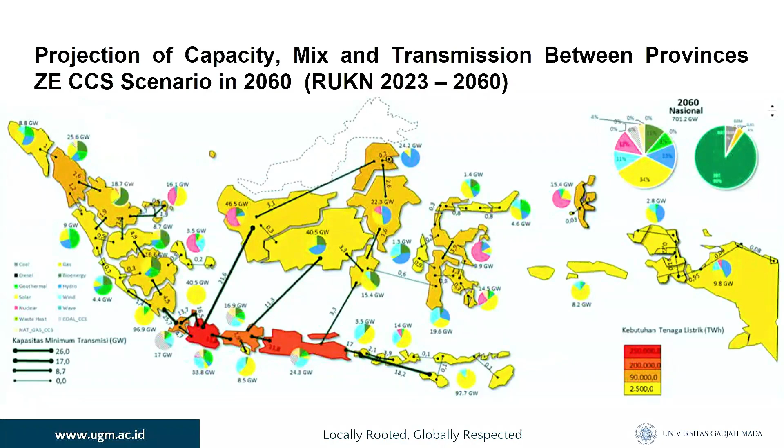Okay, the image depicts Indonesia's projected energy landscape in 2060 under the ambitious zero emission with carbon capture storage scenario. This vision is crucial for achieving Indonesia's climate goals and reducing carbon emission. By 2060, the national energy mix will undergo a significant transformation with a substantial increase in the share of renewable energy sources such as solar, wind, and geothermal.

To facilitate this transition, Indonesia will also need to invest in a robust and efficient transmission infrastructure to connect energy producing regions with energy consuming areas. This will ensure a reliable and sustainable energy supply across the country.

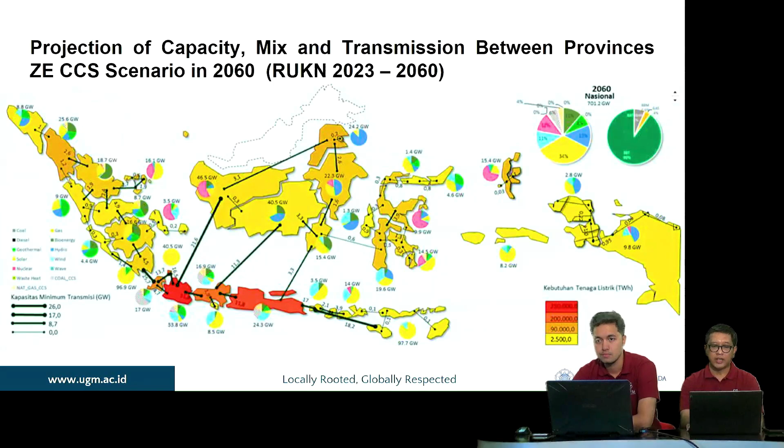Okay, the pie chart illustrates the diversity of power plant types in Nusa Tenggara Timur in 2021 with a total installed capacity of 448.92 megawatts. The dominant power plant type is gas-fired power plant, accounting for 40% of the total capacity. Diesel power plant follows closely behind at 37%, while geothermal power plant and microhydro power plant contribute 3% and 1% respectively.

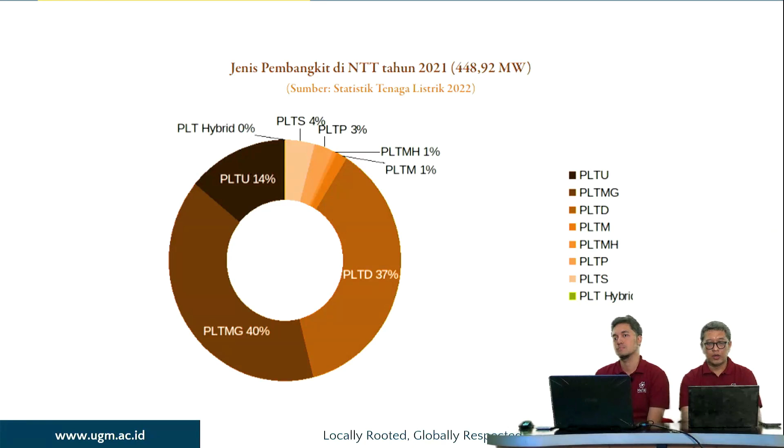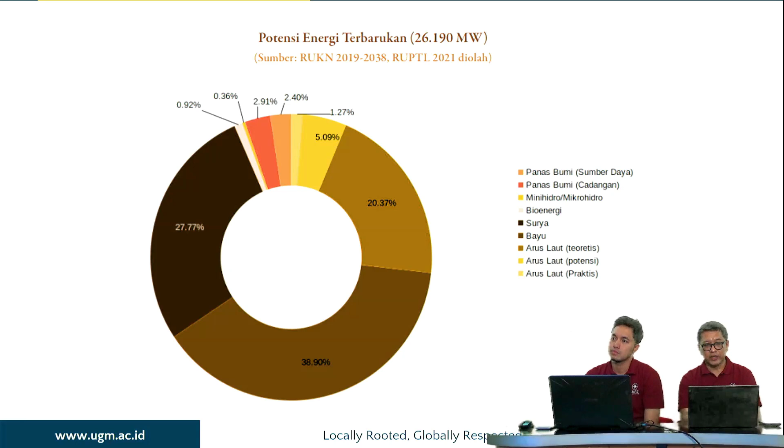Okay, the Oosterschelde Tidal Power 2 project is a successful example of harnessing tidal energy for electricity generation, located within the Oosterschelde, the storm surge barrier in the Netherlands. This project utilizes a series of Tocardo T2 turbines to convert the kinetic energy of tides into clean electricity with an installed capacity of 1.2 megawatt.

The project generates approximately 1.4 gigawatt hour of electricity per year, enough to power 1,000 Dutch households. This renewable energy source contributes to reducing greenhouse gas emission and supports sustainable development in the Netherlands.

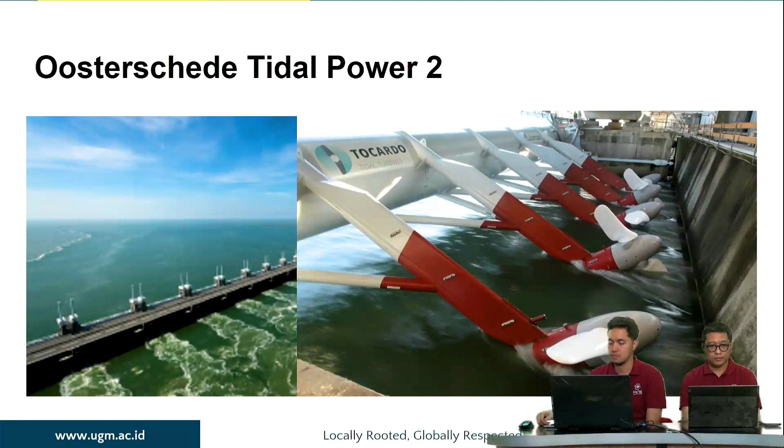Oosterschelde Tidal Power 2, or OTP2, is a tidal power project in one of the openings of the Oosterschelde storm surge barrier, which is part of the Dutch Delta Works. The Oosterschelde is an estuary with the highest tidal movement in the Netherlands. The velocity of the flow is between 4.5 and 5 meter per second.

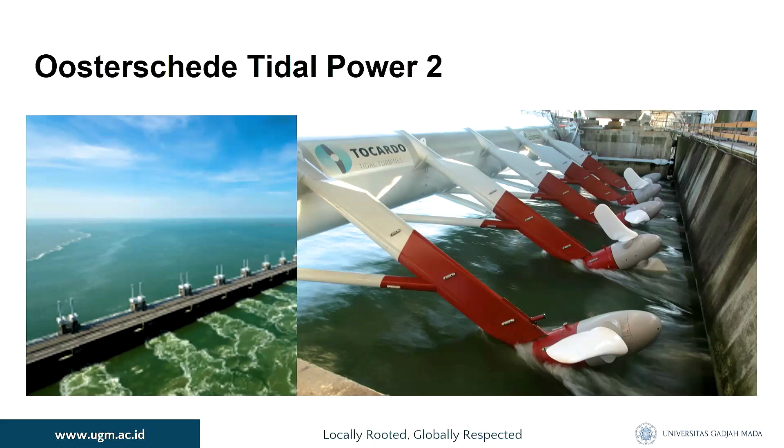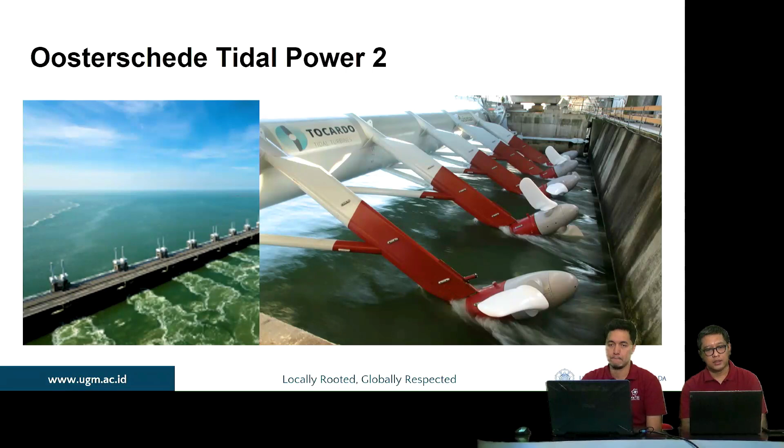The tidal power project contains 5 turbines of 250 kilowatt installed power each. The total power plant has 1.25 megawatt installed capacity, which means power generation for about 1,000 Dutch households. Next.

The tidal power plant Larantuka is a promising renewable energy project located in the Larantuka Strait, Flores Timur, Nusa Tenggara Timur, Indonesia, with an estimated flow velocity between 4.5 and 5.0 meter per second. The project has a suitable potential for power generation. The installed capacity of 30 megawatt is expected to produce approximately 80 gigawatt hours of electricity per year.

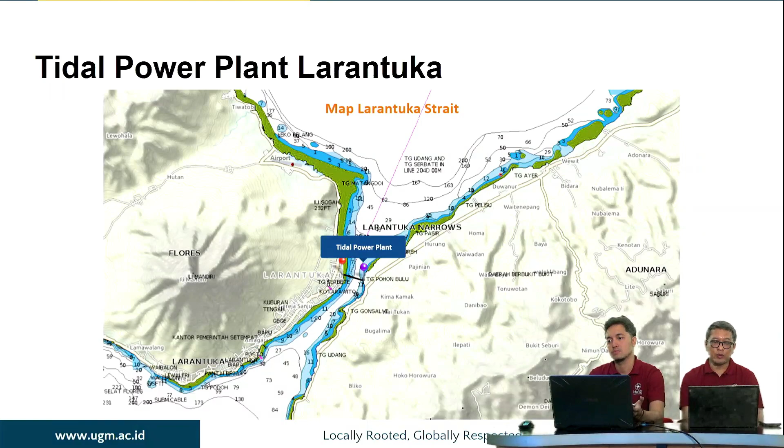The estimated budget for the project, including the construction of the tidal power plant and surrounding infrastructure, is around 225 million US dollar. Next. This is the location of Larantuka tidal power plant in the Larantuka Strait, located between Flores and Adonara. Next.

Okay, the Indonesian government has implemented various policies to promote the development of renewable energy sources. The National Energy General Plan, or RUEN, serves as the primary guideline for energy development, setting targets for the new and renewable energy mix in each province, including Nusa Tenggara Timur. To encourage investment in NRE projects, the government offers a range of fiscal incentives such as income tax exemption, import duty reduction, and value added tax benefits.

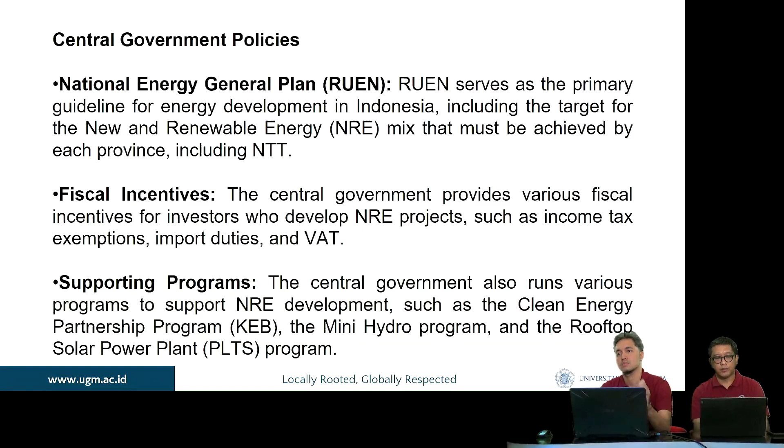Additionally, the government supports NRE development through programs like the Clean Energy Partnership Program, the Mini Hydro Program, and the Rooftop Solar Power Plant Program. These initiatives aim to accelerate the transition to a more sustainable and energy efficient future for Indonesia. Next.

And then the regional governments in Indonesia play a crucial role in supporting renewable energy development. Each region, including Nusa Tenggara Timur, has its own regional energy general plan or RUED, which provides a detailed roadmap for NRE implementation. This RUED outlines the region's renewable energy potential, sets specific targets for the NRE mix, and establishes development strategies. Additionally, regional governments issue various regional regulations or Perda to facilitate NRE development.

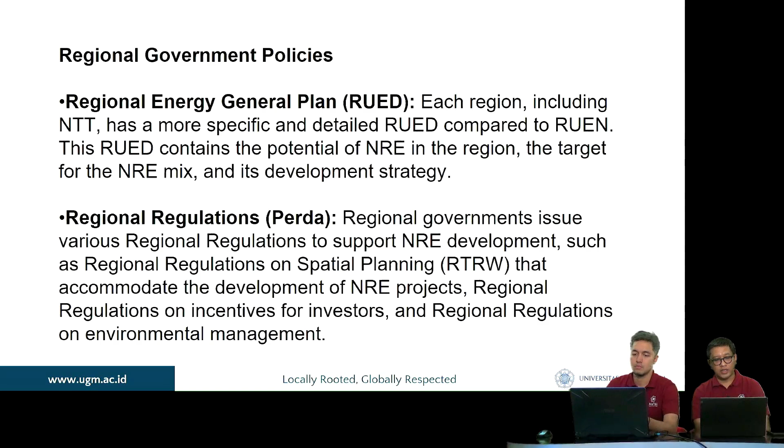These regulations cover areas such as spatial planning to accommodate NRE projects, incentives for investors, and environmental management. These combined efforts from regional governments contribute significantly to Indonesia's overall progress in transforming to a renewable energy based economy.

Okay, the tidal power plant Larantuka project encompasses comprehensive infrastructure development. In addition to the tidal power generation facilities, the project includes the construction of 4 tidal bridge elements, which are equipped with 8 fish flow tidal power turbines. These turbines will harness the energy from the tide to generate electricity. To facilitate transportation and connectivity, a civil bridge will be built to connect the islands of Flores and Adonara. Furthermore, land reclamation efforts will be undertaken in Larantuka to ensure the smooth transition from the bridge to the mainland. Next.

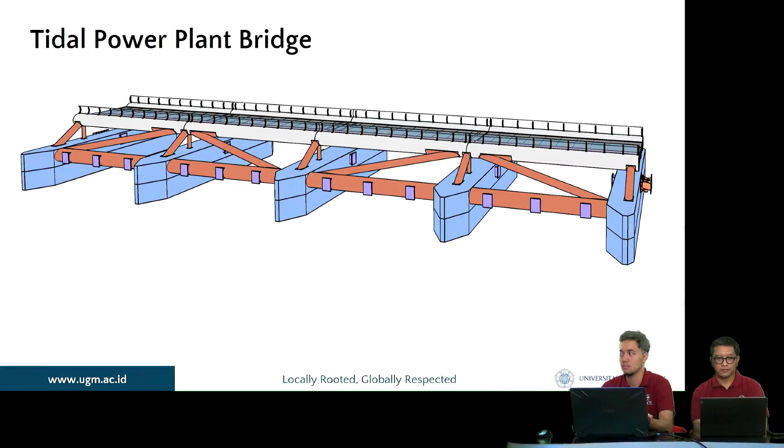This image depicts the design of the tidal power plant bridge, a key component of the Larantuka tidal power plant project. The bridge will serve as a platform for hosting the tidal power turbines, allowing them to efficiently capture the energy from the tides.

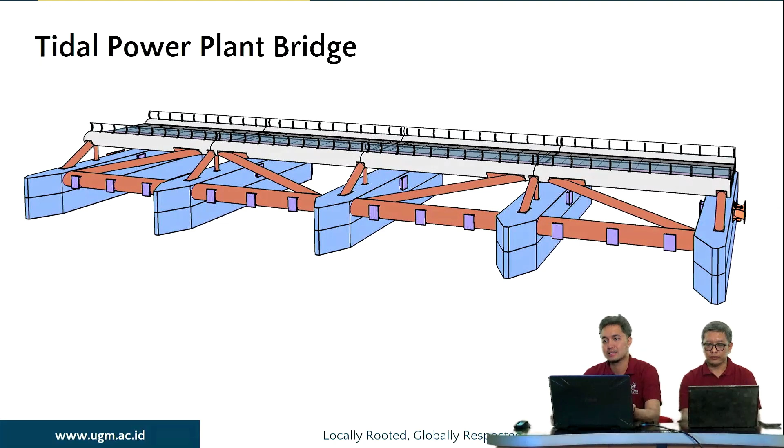Okay, the added value of the tidal bridge consists of the reduction of installation and maintenance costs and the improvement of the power output. The tidal bridge will reduce installation and maintenance costs by 40 to 50% compared to turbines which are placed on the sea bottom. This is mainly achieved by the clever concept of using a larger structure to mount multiple turbines on the electric infrastructure at the surface, fully integrated.

The tidal bridge improves the power output by 10 to 25% because the turbines are placed near the surface where the velocity of the water is higher, resulting in more effective use.

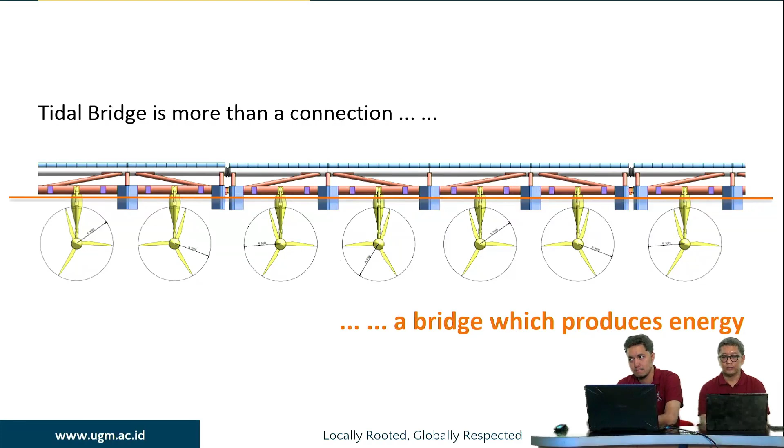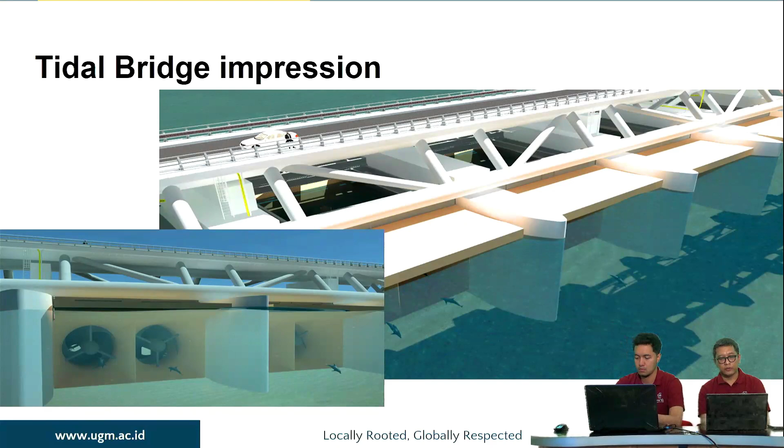Okay, this image depicts an artist's impression of the tidal bridge, showcasing its innovative design and functionality. The top portion illustrates the bridge as a roadway, allowing for transportation across the waterway. The bottom portion highlights the submerged turbines that will harness the tidal energy to generate electricity. The unique design demonstrates the bridge's dual purpose as both transportation infrastructure and a renewable energy source.

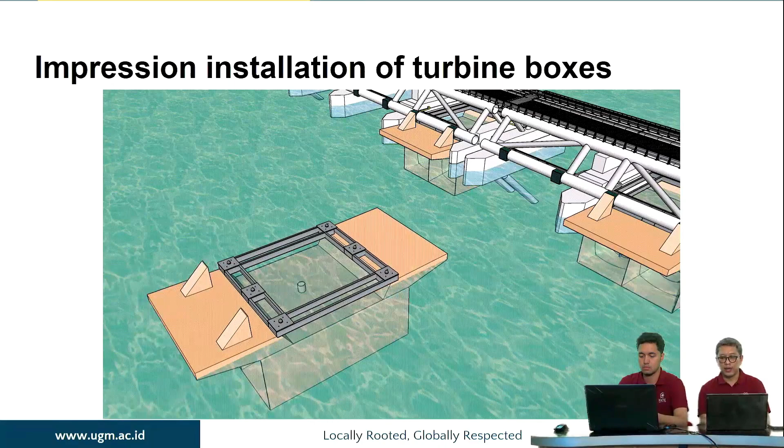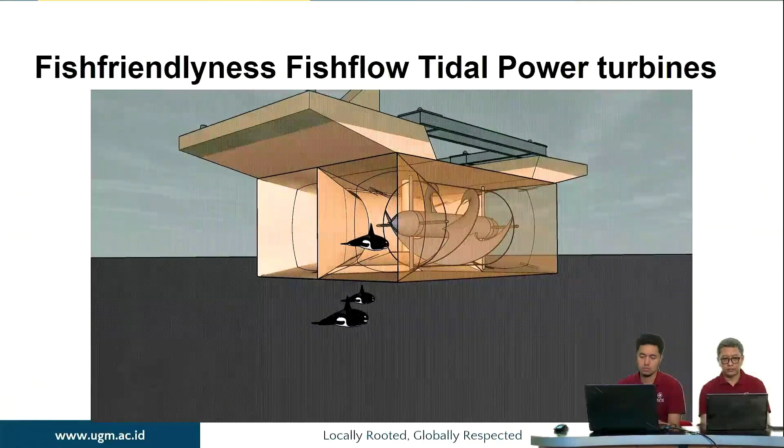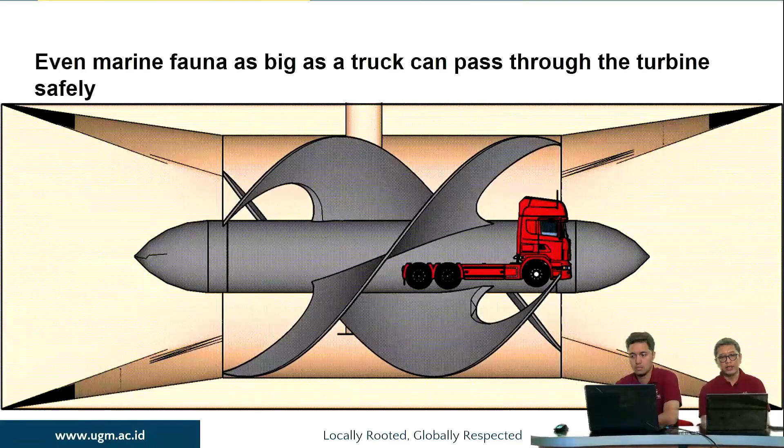Yeah, this video illustrates the unique design of the fish flow tidal power turbines, showcasing their ability to safely accommodate even large marine fauna. A truck is passing through the turbine flow path, demonstrating the spaciousness and minimal risk of harm to aquatic life. This feature highlights the project's commitment to environmental sustainability and responsible energy generation. Next,

Mas Bayu. Okay, thank you, Mas Ferry, for the opening presentation. I will continue the presentation and talk about energy demand and renewable energy potential in Nusa Tenggara Timur, Indonesia. As you can see, the projected electricity demand in Nusa Tenggara Timur through 2050 is measured in gigawatt hours.

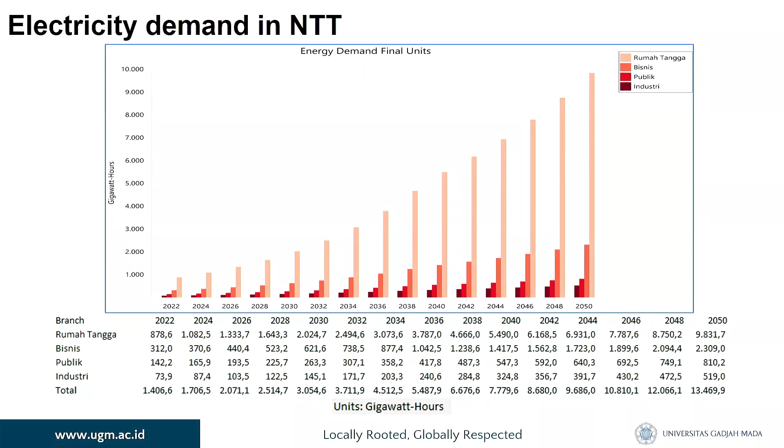Based on the displayed data, the total electricity demand is expected to increase significantly from 1,406.6 gigawatt hours in 2022 to 13,469.9 gigawatt hours by 2050. In detail, the demand by sector is as follows.

Household electricity demand is projected to rise from 878.6 gigawatt hour in 2022 to 9,831.7 gigawatt hour in 2050. This significant rise in electricity demand reflects the economic growth and population increase in Nusa Tenggara Timur, which necessitates an expansion in energy supply capacity to meet these needs.

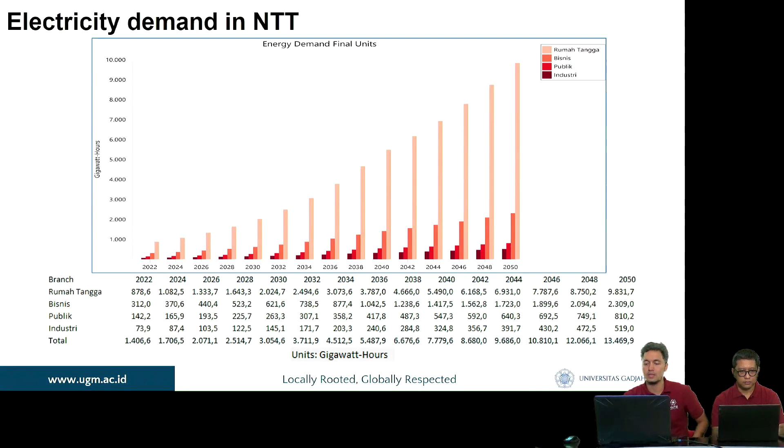Now, the renewable energy potential in Nusa Tenggara Timur from the table above shows the potential. The total energy potential reaches 23,812 megawatt, with an installed capacity of renewable energy now of 29.23 megawatt, an average utilization rate of 0.12%.

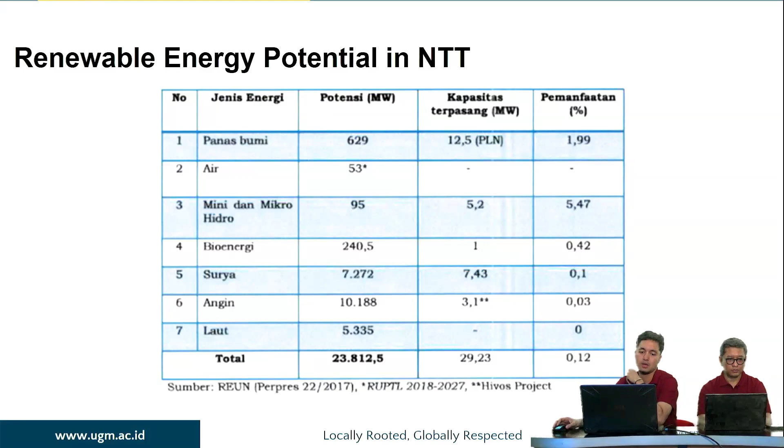Overall, Nusa Tenggara Timur has significant potential for renewable energy, but the level of utilization remains very low. Geothermal is 1.99%, micro hydro is 5.47%, and last, ocean energy is less than 1%.

And the scenarios that we have simulated: we have two scenarios. The first is the BAU scenario, or business as usual scenario, based on RUPTL in Nusa Tenggara Timur, with the availability of fossil energy in 2022 at 96.4%, and in 2050 at 89.9%.

And the second scenario is the optimistic renewable energy scenario, based on potential energy by RUED in Nusa Tenggara Timur, with the availability of fossil energy in 2022 at 96.4%, and in 2050 at 36.6%.

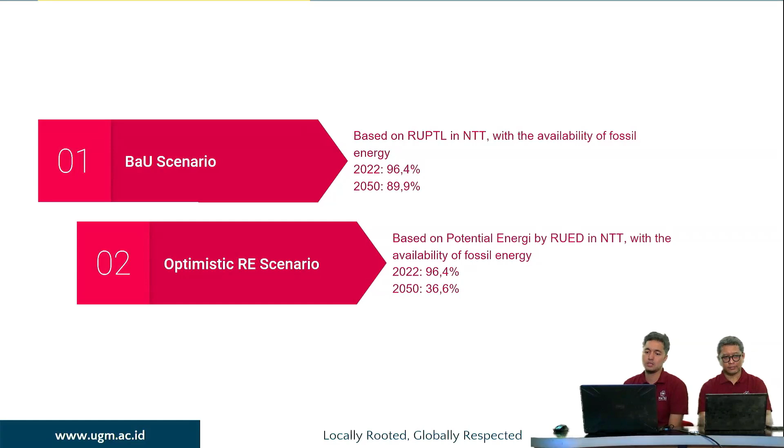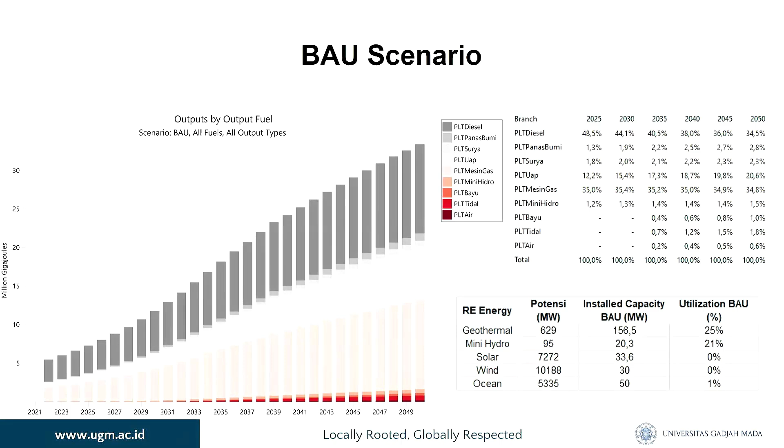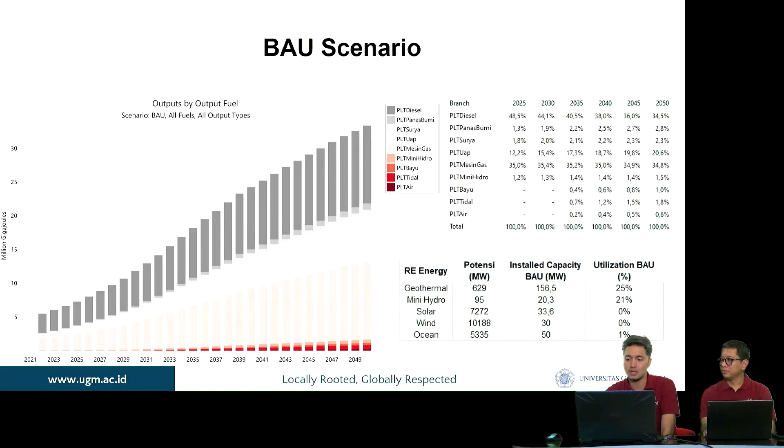Okay, we move to energy analysis based on the output result in the BAU scenario. The largest percentage of electricity generation comes from diesel power plants, followed by oil and gas power plants, and then coal power plants. From this data, it is evident that fossil energy still plays a dominant role in supplying electricity in the province Nusa Tenggara Timur. Furthermore, the utilization of existing renewable energy potential has not been maximized, as shown in the image above.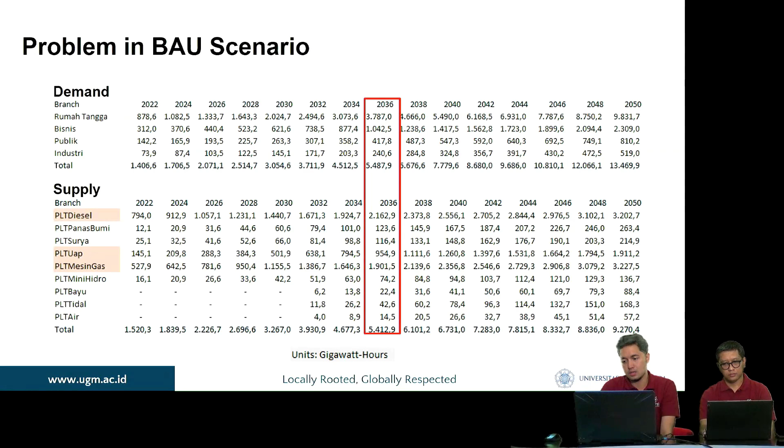Now, the problem in the BAU scenario, based on the RUPTL in Nusa Tenggara Timur: it can be seen that by 2036 Nusa Tenggara Timur will experience a shortage of electricity supply, which will continue in the following years. This may be caused by the underutilization of existing energy potential or the lack of available technology in Nusa Tenggara Timur. By 2050, Nusa Tenggara Timur is projected to experience an electricity supply shortage of 4,199.5 gigawatt hour.

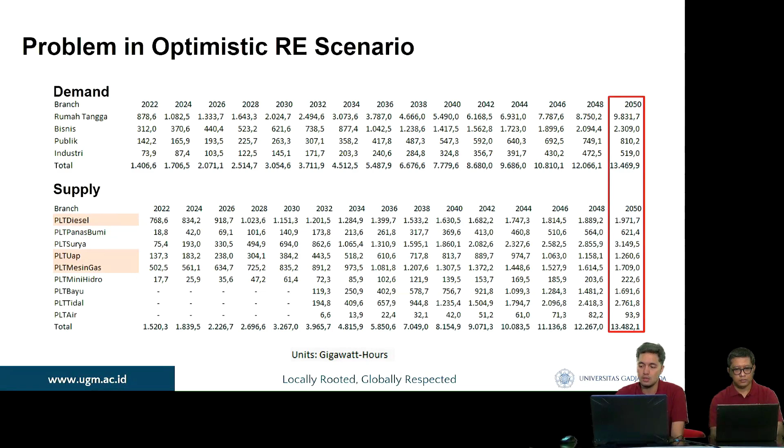So there is no problem in the optimistic renewable energy scenario because we have made some solutions to increase the use of renewable energy and reduce the use of fossil fuel as the source of power generation in the province Nusa Tenggara Timur. As can be seen from our analysis and simulation, Nusa Tenggara Timur does not experience an energy shortage by utilizing the available potential energy sources. Maybe we can go back to the previous slide.

The renewable energy potential in Nusa Tenggara Timur: if we can maximize the potential in the future, it's possible that Nusa Tenggara Timur could supply its electricity independently, only using renewable energy power plants.

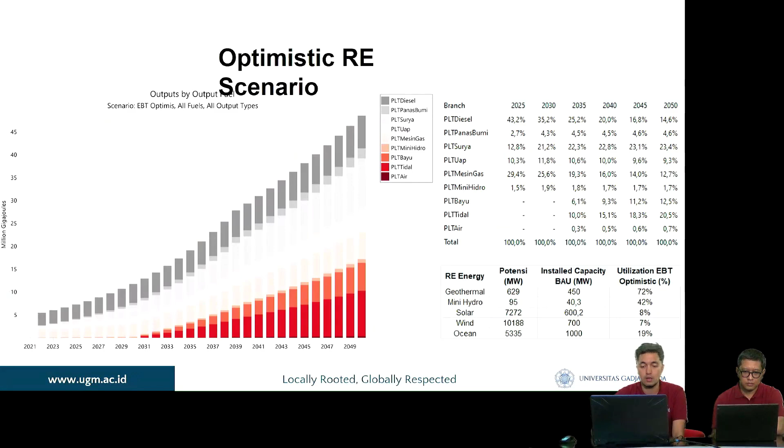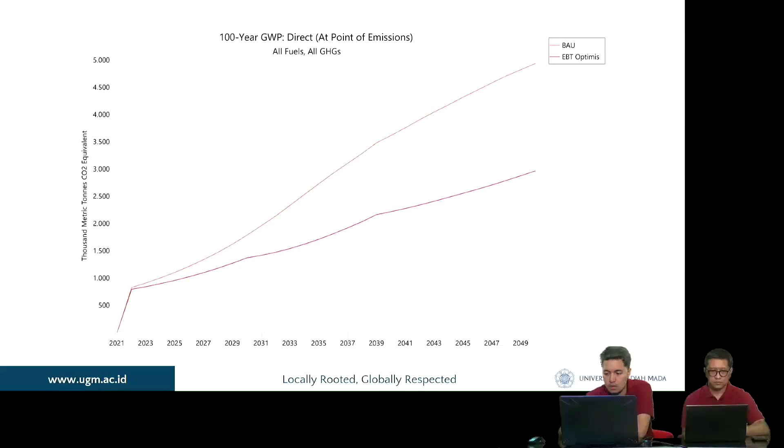Meanwhile, under the optimistic renewable energy scenario, which assumes a more aggressive adoption of renewable energy, emissions remain lower than BAU, though still on an upward trend, reaching around 3,000 thousand metric tons of CO2 equivalent by 2049. This graph highlights that although the optimistic renewable energy scenario can cap the rate of emission growth, both scenarios exhibit an upward trend in emissions through 2049.

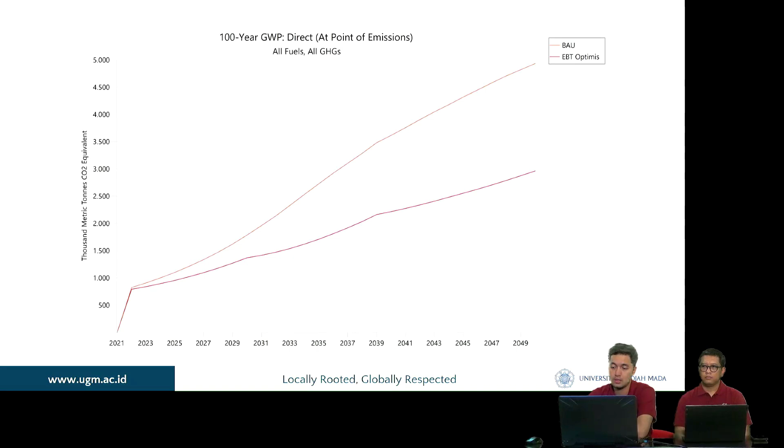Okay, the conclusion maybe can be read by Mas Ferry.

Thank you, Mas Bayu. The conclusion, we have three. The first is renewable energy potential. The project highlights the significant potential for renewable energy development in Nusa Tenggara Timur, with tidal power being a promising source. The second is infrastructure development. The project involves the construction of innovative infrastructure, such as the tidal bridge and its integrated turbines, demonstrating the potential for combining renewable energy generation with other infrastructure needs.

And the last is challenges and opportunities. The analysis of different scenarios underscores the challenge in meeting future energy demand in Nusa Tenggara Timur. Even with ambitious renewable energy targets, it emphasizes the need for a comprehensive and integrated approach to energy planning and development in the region.

And the expectations, we also have three. The first is increased renewable energy adoption. The project will significantly contribute to Nusa Tenggara Timur's renewable energy mix, reducing reliance on fossil fuel and promoting a cleaner energy future. The second, economic benefit: the project is expected to stimulate local economic growth through job creation, infrastructure development, and increased tourism.

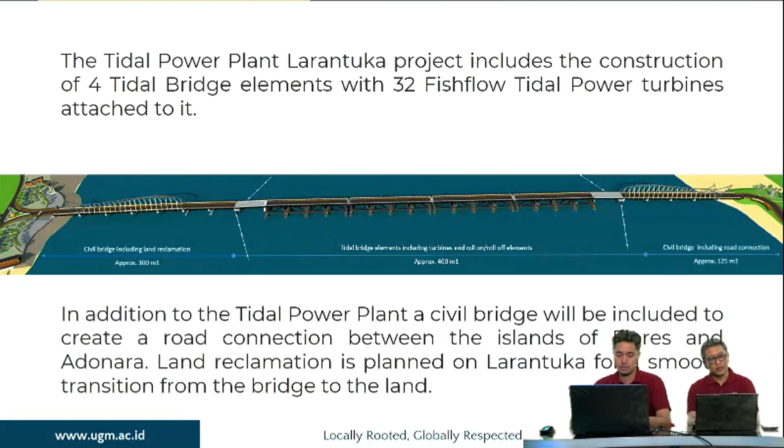I'll try to answer for the key technical features. Maybe we can go to slide 16, Mas Bayu. Okay, we have four items for the key technical features. The first is the tidal bridge element. This project incorporates four bridge-like structures that host the power generation equipment. And the second is 32 Fishflow tidal power turbines. These specialized turbines are designed to generate electricity from tidal movement.

Number three is the civil bridge component. In addition to power generation, the project includes a bridge connecting the islands of Flores and Adonara, serving the dual purpose of energy production and transportation infrastructure. And the last is the land reclamation plan on Larantuka to ensure a smooth transition from the bridge to the land. And for the question regarding environmental concerns, we have five.

The first is fish-friendly turbine design. The Fishflow tidal power turbines are specially designed to allow safe passage of marine life, including large marine fauna. The second is a renewable energy source: by harnessing tidal power, the project reduces reliance on fossil fuels, thereby lowering carbon emissions. And then minimal visual impact. The integration of the power plant with the bridge helps minimize additional visual impact on the landscape.

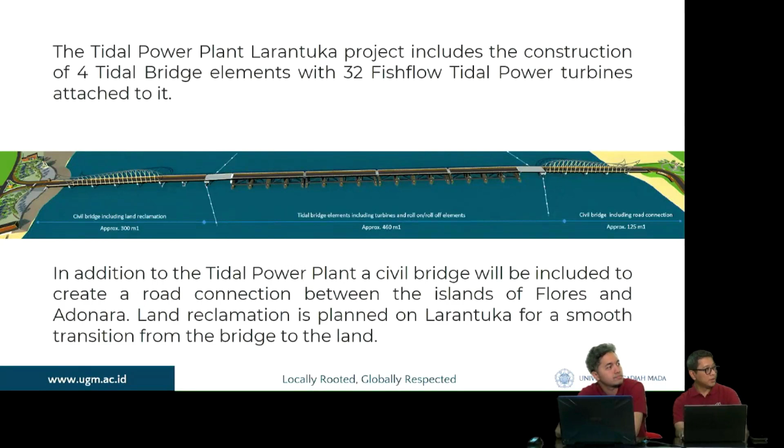Number four is multi-purpose infrastructure: by combining power generation with transportation infrastructure, the project maximizes utility while minimizing the overall environmental footprint. And the last is support for broader renewable energy goals. The project contributes to NTT's transition away from fossil fuel, supporting larger environmental protection efforts. Maybe this is the answer, Mas.

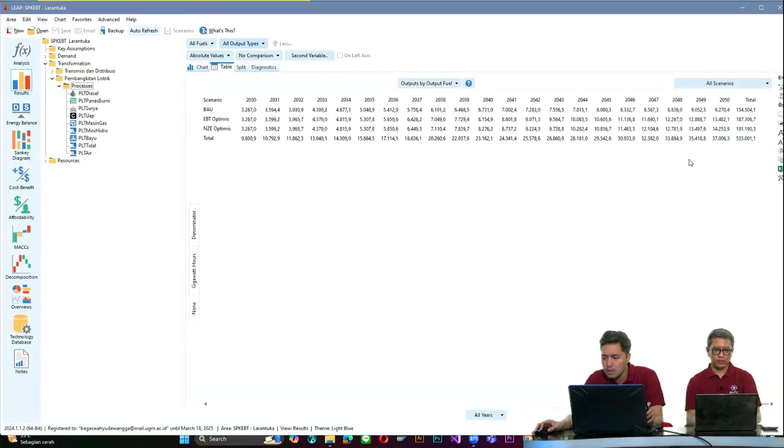Previously, we tried to analyze what happens if the renewable energy potential in Nusa Tenggara Timur is maximally used. As we can see, in the last section, the NZE optimistic scenario, using renewable energy potential maximally and shutting down all fossil fuel, in the last year the renewable energy that we get is 14,253.9

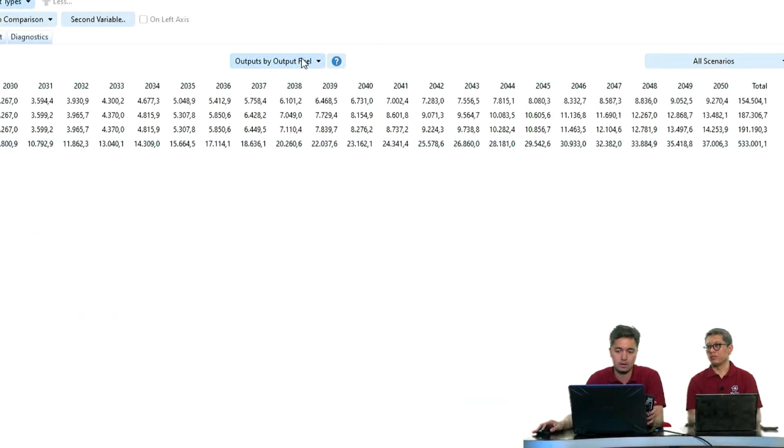gigawatt hours, while the energy demand is, sorry, only 13,000 gigawatt hours. So the answer is yes, we can. But

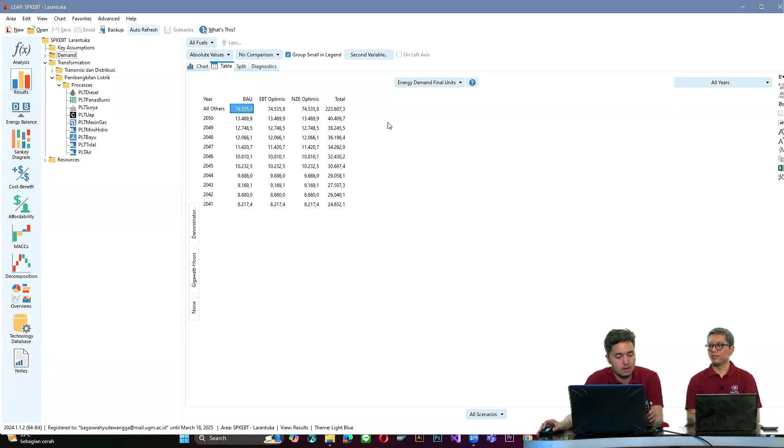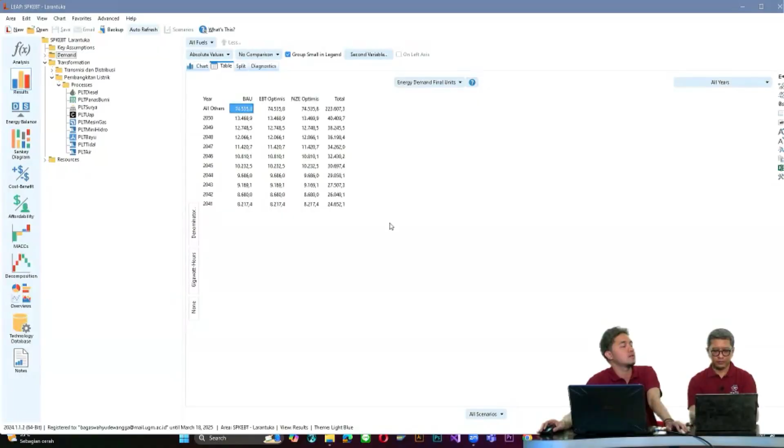we have not had the opportunity to present the NZE scenario because we have no information about the readiness of existing technology to provide the maximal renewable energy potential. Okay, thank you. Okay, thank you for the answer.